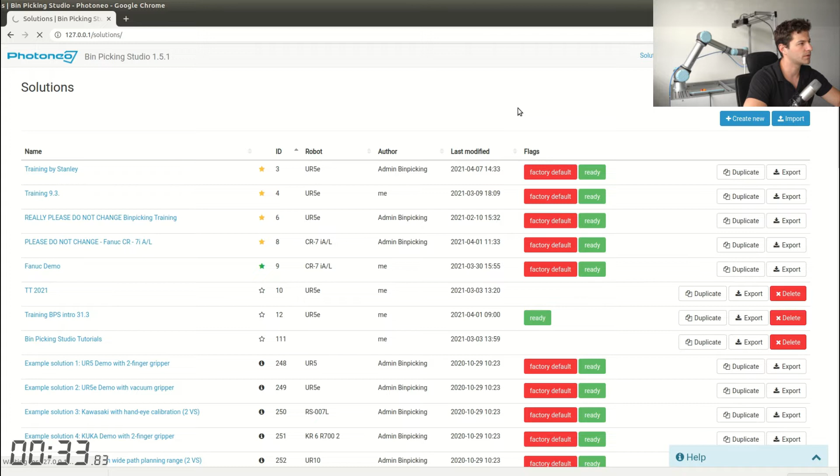In the background it is loading its files into the database. It will take something like 10 seconds usually. I will provide a descriptive name, so it will be bin picking speedrun, for example. I'll omit description for now. The robot is actually Universal Robot UR5 and it is E-series.

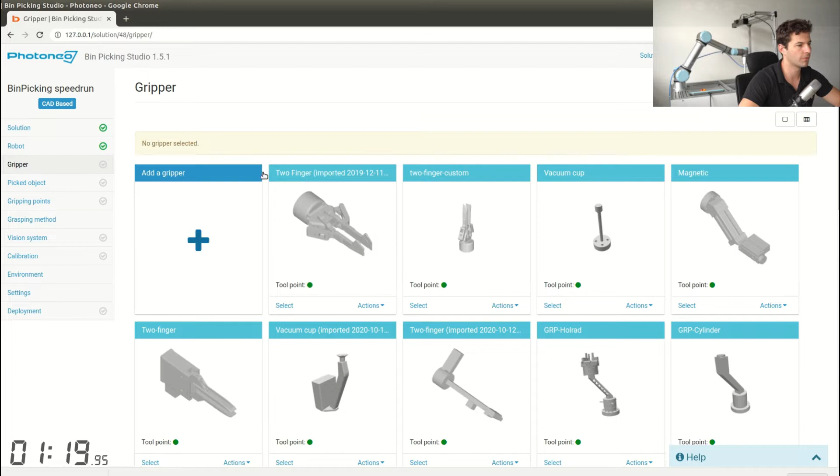Inside the robot there is already a bin picking program, a simple program which will be executing functions like scan, get trajectory, execute trajectory, move to the placing position, and similar. For the gripper, I'm going to create a new one from scratch. It will be gripper speedrun.

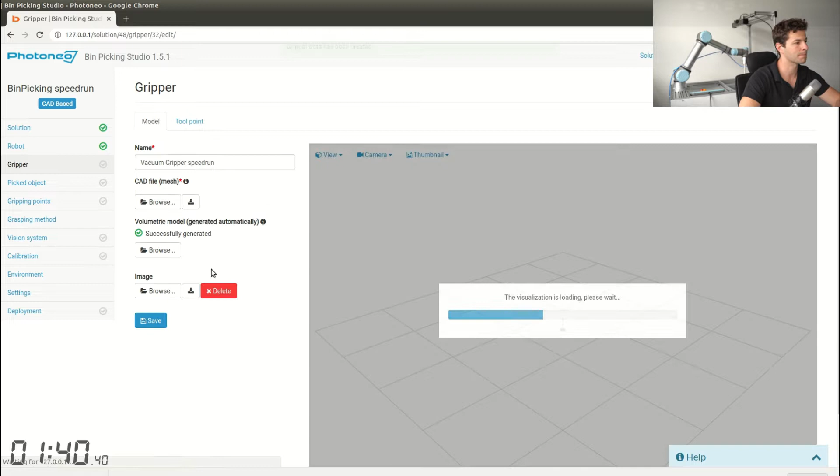Maybe provide a more descriptive name like vacuum gripper speedrun, and I'm going to open up the CAD file of my gripper mounted on the robot, and here it is. Double check if the origin of the file is on the bottom, and yeah, it's good. I'm going to use it.

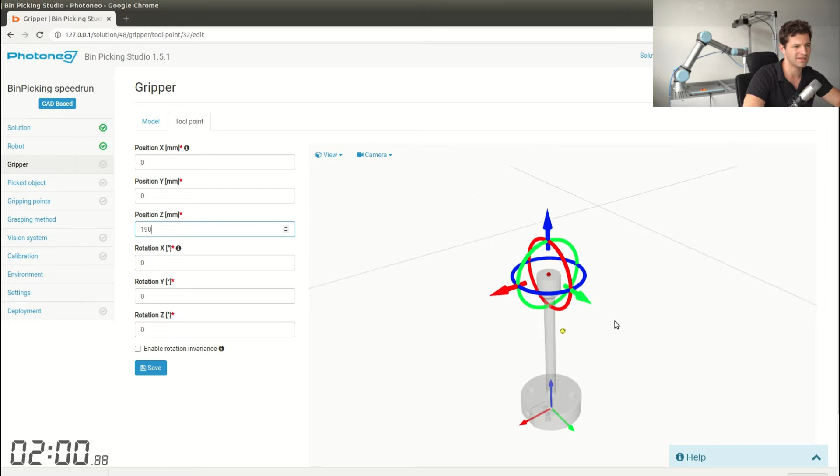To set up a tool point, I will use those arrows in here and move it to the favorable position at the end of the gripper, maybe round it up to 190 millimeters. Okay, it looks good to me as it is right now. You can see that the gripper is symmetric, so I'm going to enable rotation invariance in Z-axis and save it.

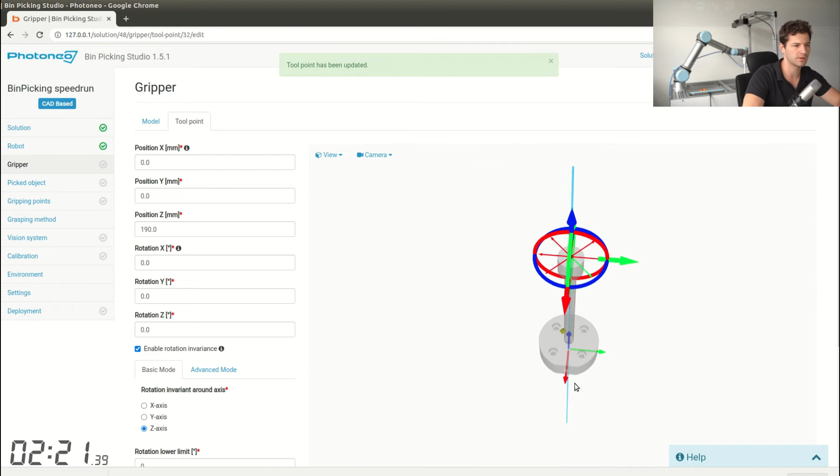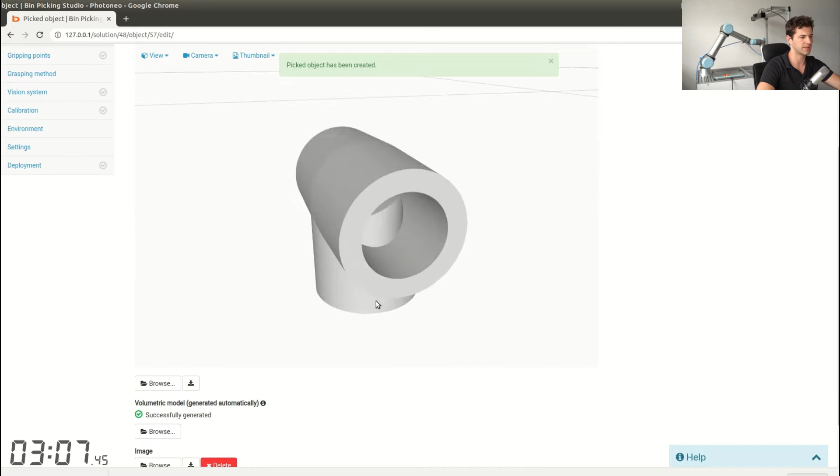For the part, I need to set up some gripping points on the surface of the part, and it's a simple process, just like for the gripper. It is plastic T-fitting. Alright, insert CAD file and save. Similar to a gripper, a volumetric model is generated for collision avoidance. I can examine, okay, my model is correct, and hit the save button.

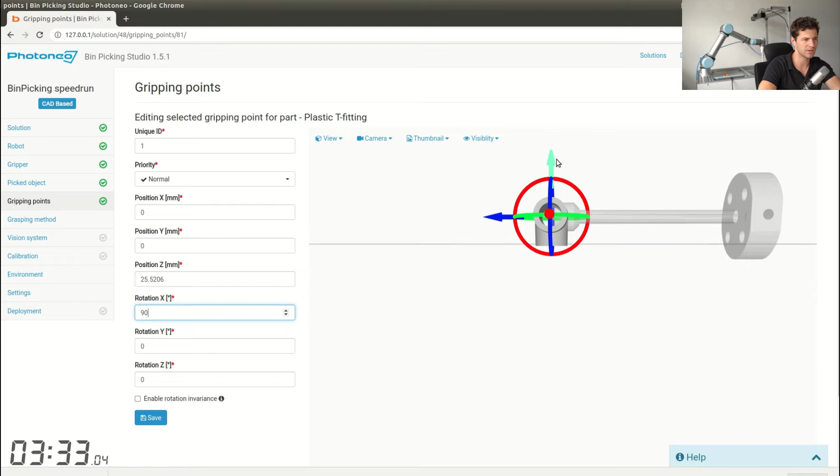For the gripping points, I'll choose my workpiece and I'll add a new set of gripping points via similar visualization. First of all, I'm going to rotate the gripper 90 degrees, so I'm going to pick it from the side, and maybe move it a little bit in this direction and this direction, so it is in correct position, something like this. This looks like a good position for gripping.

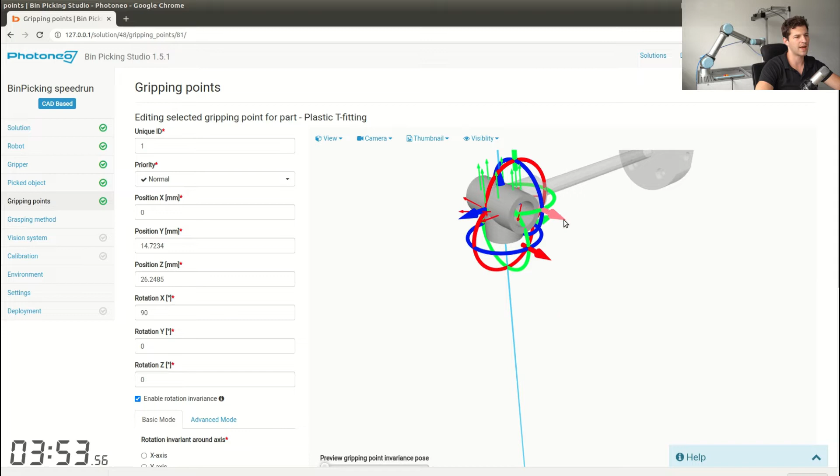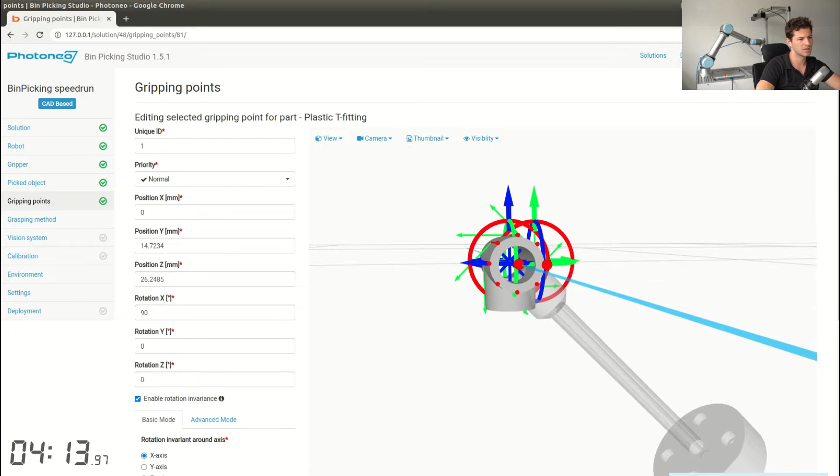Also, this piece has a little bit of symmetry itself, and I'm going to enable it, and I see it is an X symmetry, so this axis is loaded in here. I just need to move it using these arrows again to the correct position, to the center of the opening. And also, since I don't want to do a full rotation, just half of it, I will limit the upper limit to 180 degrees.

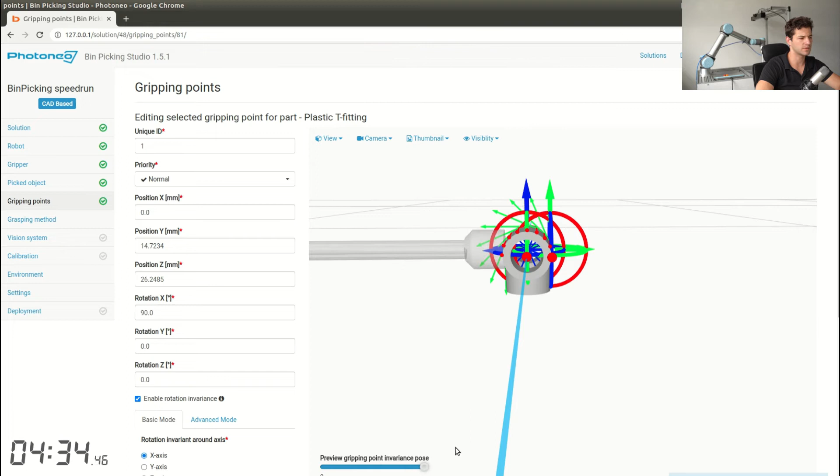Everything else looks good to me, and this is what I have right now. 8 different gripping points, actually 9 different gripping points all around the surface of the plastic workpiece. Hit save, just double check, okay, it looks good to me, going forward.

For the grasping method, we have multiple path stages. These are waypoints which are generated during the path planning, and these waypoints are like a blueprint for the trajectory. We will begin in start waypoint, going through all of these, and end in end position. Start and end positions are loaded from the teach pendant and they are saved positions.

So what I can do is just bind some kind of procedure to them. Detach procedure inside the robotic program is a procedure which has digital output set to 0. So I release the gripper before I'm going to do bin picking.

The approach waypoint is the first calculated waypoint, and it will take a grasping position, which is something like this, and will generate some kind of offset. I will use the coordinate space of my workpiece in order to generate this offset, and I'm going to set it to, let's say, 20 millimeters. It will be enough, 20 millimeters in front of the object, right? Something like this. If my object moves, this waypoint will be calculated in a different place.

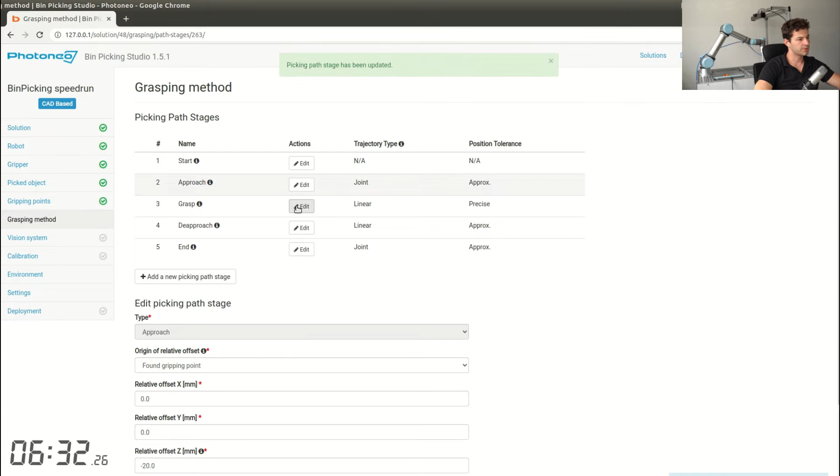And what I'm going to do as well is to enable attach right here, because I have a vacuum gripper, and the vacuum gripper may be enabled in front of the picking. So I'm going to go with enabled vacuum to touch the workpiece and literally suck it into the gripper. Save the position. Going to grasp. Since I enabled vacuum in the approach position, I don't need to do anything else.

Going to the deapproach position, and now the deapproach is the third one calculated. Actually, the grasp is calculated first, then the approach is offsetted, and the deapproach afterwards is a waypoint which serves as going out of the bin. Usually we use a robot coordinate system, or we use a fixed plane, which is basically the XY plane, offsetted from the base of the robot by some amount.

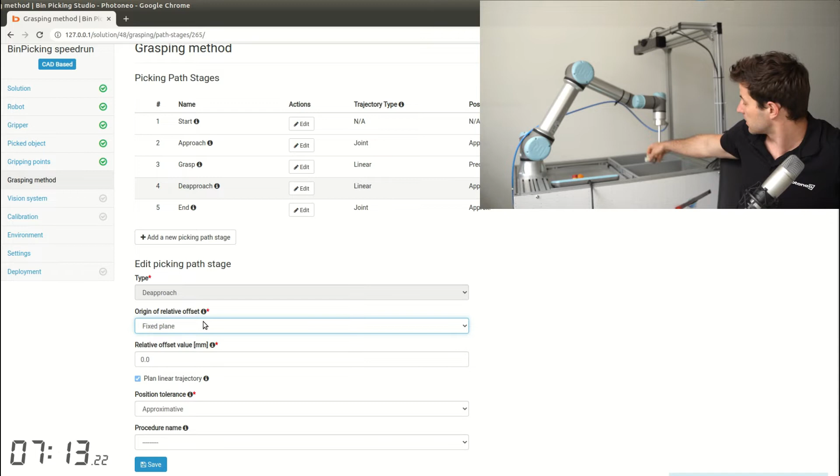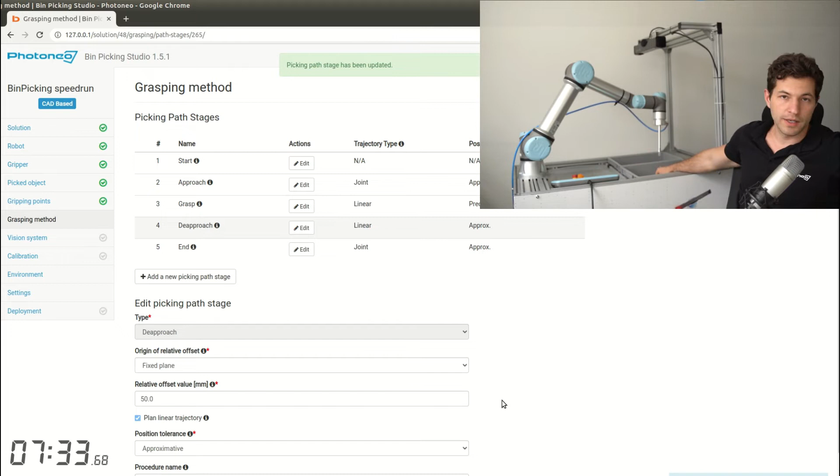Since I want to remove the parts like 5 centimeters above the bin, and the bin is ending literally at the base of the robot, I just need to put an offset value of, let's say, 50 millimeters in here. Very easy. And hit save. So all of the parts will end up 50 millimeters above the base of the robot, which is in fact above the bin. And hit save, and that's it.

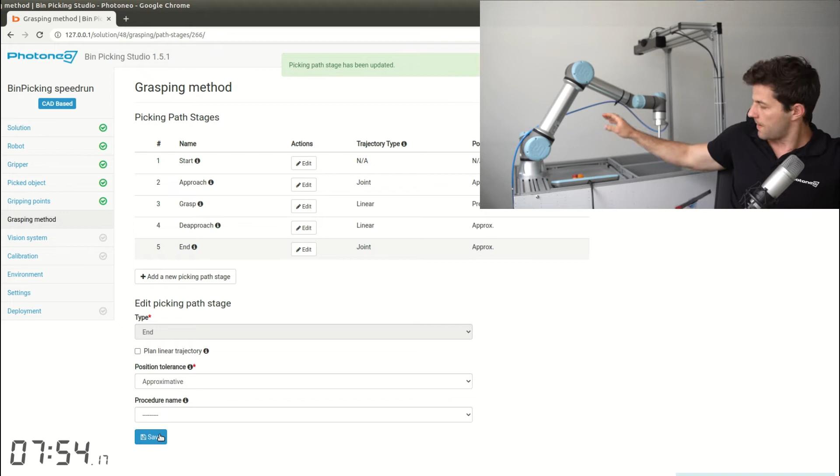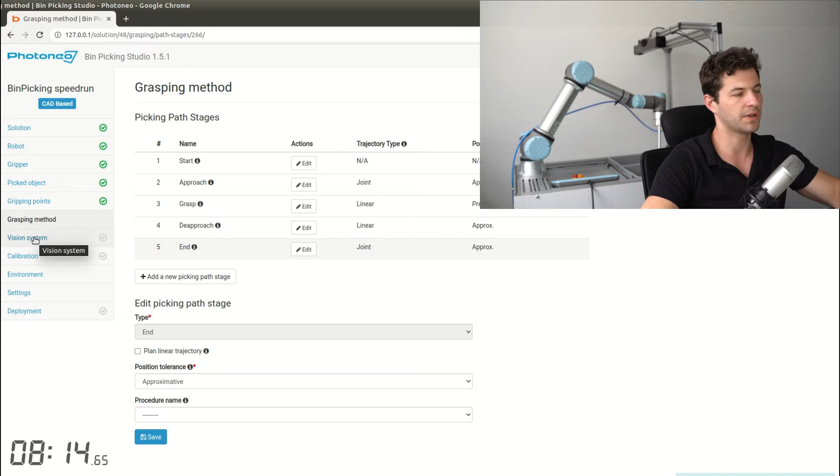After the deapproach, we are going to the end position. The end position is transmitted from the robot program into Bin Picking Studio, so I don't need to do anything else. Inside the robotic program, the bin picking ends up in the end position, and then there are a couple of MoveJ commands which will just navigate the robot to the placing position, and that's it. So these are the picking path stages as a blueprint for path planning. Combined with the environment, they will generate a collision-free trajectory.

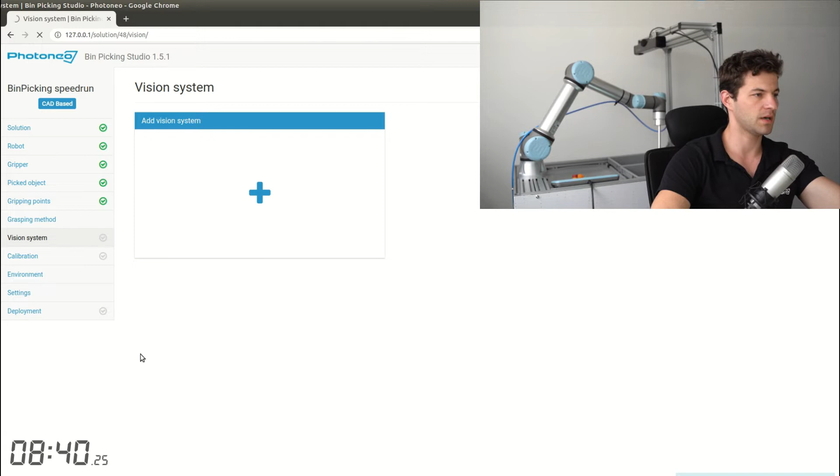The vision system part is used to bind together the workpiece, scanner position, and some other parameters. So I'm going to create a new vision system. We can have up to 4 different vision systems per one solution. This vision system is loaded in the background. It will generate this form. I will put the name for this vision system for T fitting.

Scanner ID will be used. The scanner I have attached on the top of the robotic cell, which is 1709004, right? It is a scanner M sized model, and it is mounted on the robotic cell. The picked object will be the plastic T fitting, since I have only one, and I need to create a localization profile. This is CAD based localization.

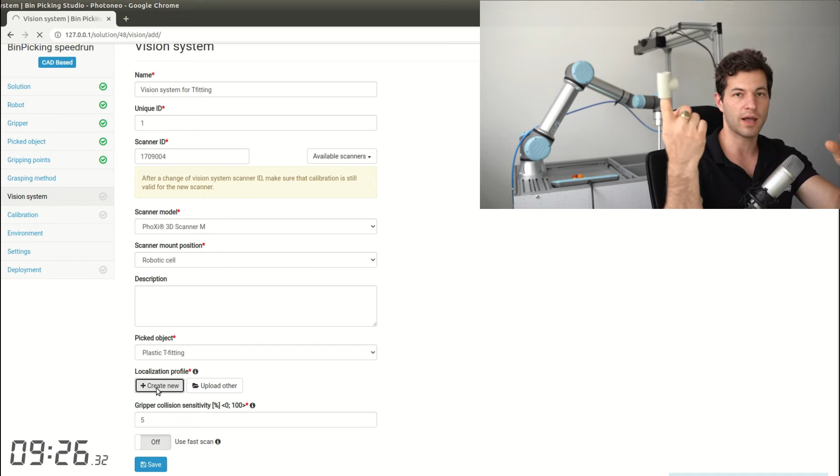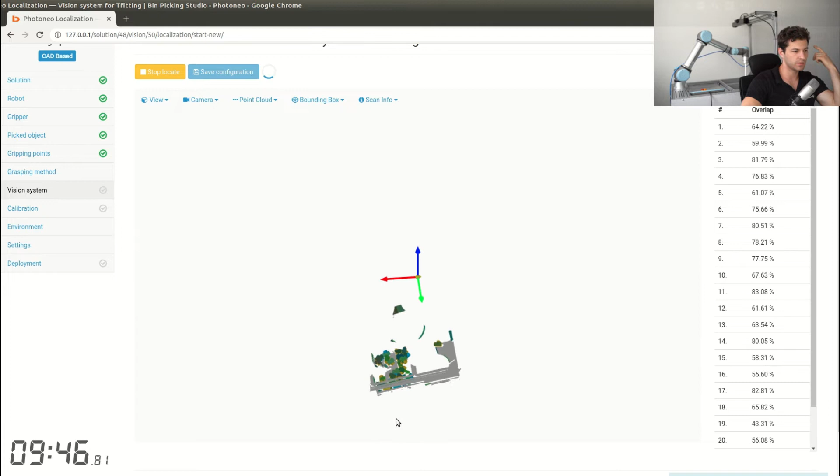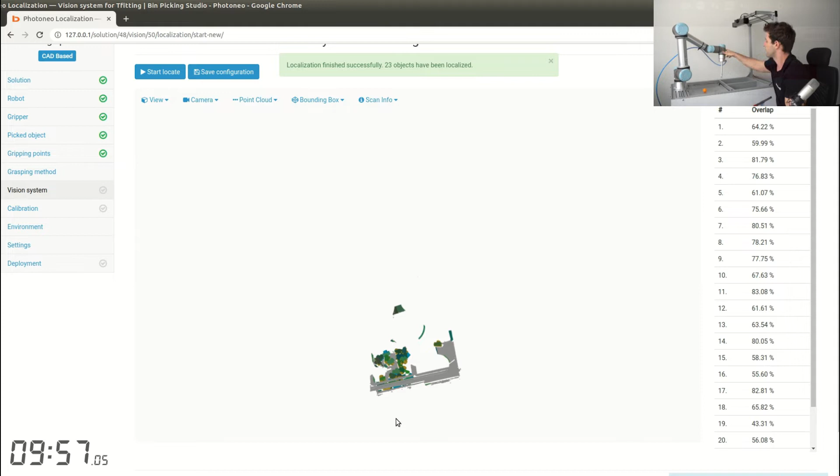So what is done in the background: the CAD file I uploaded into Bin Picking is loaded into the localization SDK, and when I hit start locate, the localization is actually starting right now. And in a couple of seconds, the point cloud from the scanner was transmitted into the studio. And now I see the robot is blocking the view, so I'm going to move him just a little bit, so we can see a little bit more into the bin.

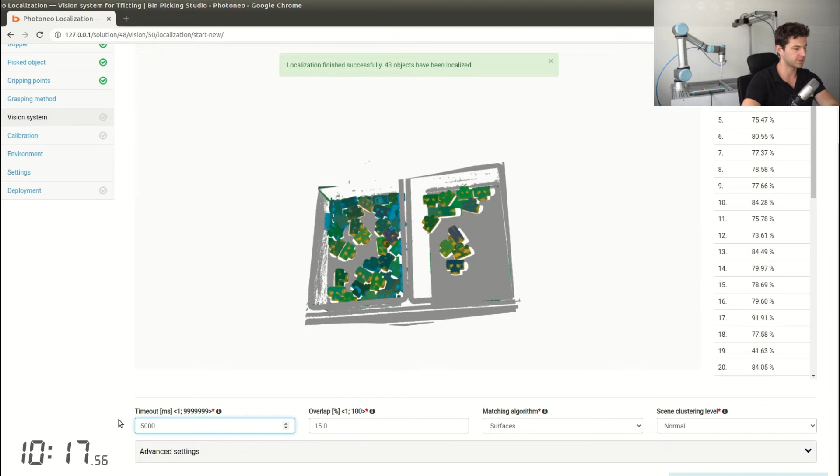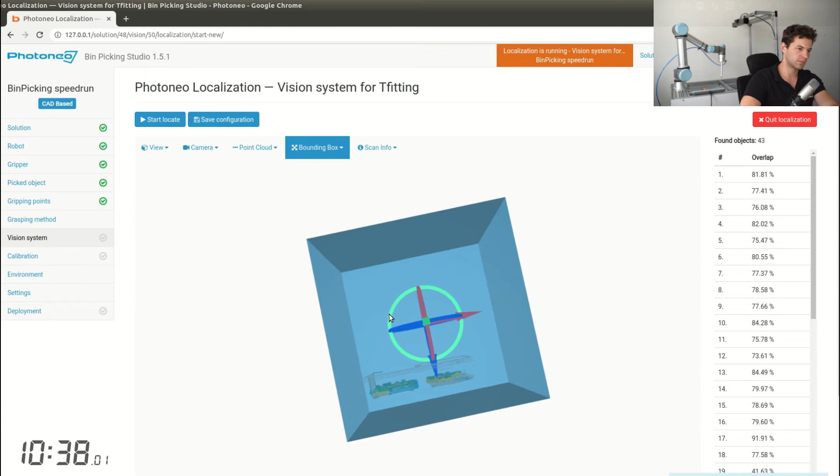Alright, now we have 43 parts in the first couple of seconds, and since nothing else was happening, I'm going to limit the timeout to 5 seconds only, so it will not be consuming all this processing power for that long duration. And also I'm going to enable the bounding box, because I'm going to pick only from the one bin, not both. And I will rotate it just a little bit, also move it to the correct position, something like this. Maybe I can also resize it to avoid any false positives.

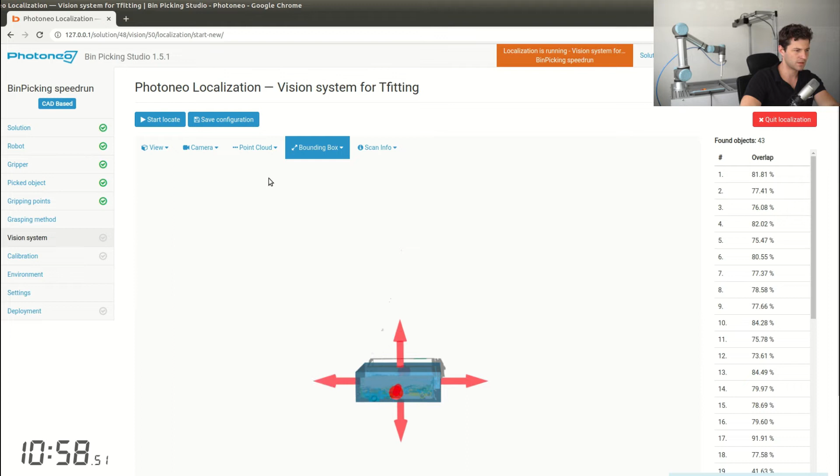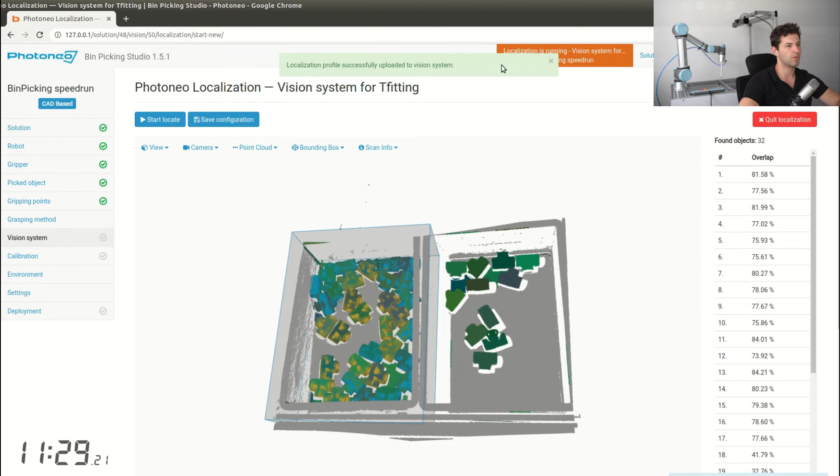Right now, when I hit start locate, you will immediately see it in action, since I have parts only in the left box. Oh yeah, it's actually the right box, right hand side of the robot. Good, pretty satisfied with the result. Out of the box settings are good. There are more settings than just these 4, but they are running pretty smoothly out of the box, so I'm not going to change them right now. I'm going to save the configuration, and once the configuration is saved, I will quit localization.

Okay, and afterwards we have localization profile. We can set up collision sensitivity. This is a threshold, how much of the point cloud is noise and how much is actually colliding with the gripper. This is something you will fine tune after you run bin picking for a couple of cycles. And I will be using fast scan, which is using only a 2-dimensional image, which is acquired in a fraction of a second, to compare previous scans, and this can literally save you seconds from cycle time.

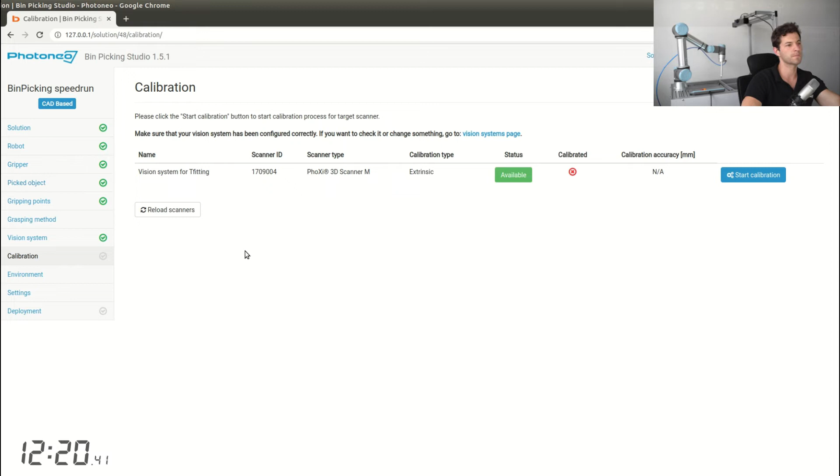Calibration matrix is pretty empty right now because we didn't do any calibration so far, but we are going to do one now. To start the calibration, I need to just select the proper size of my ball, which is going to be used for calibration. And from the robotic side, I need to remove the bins and attach a ball to a gripper. Yeah, my ball is attached.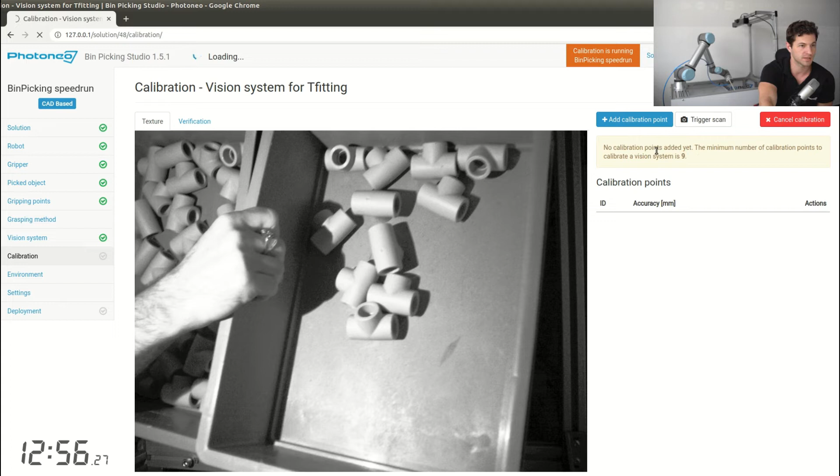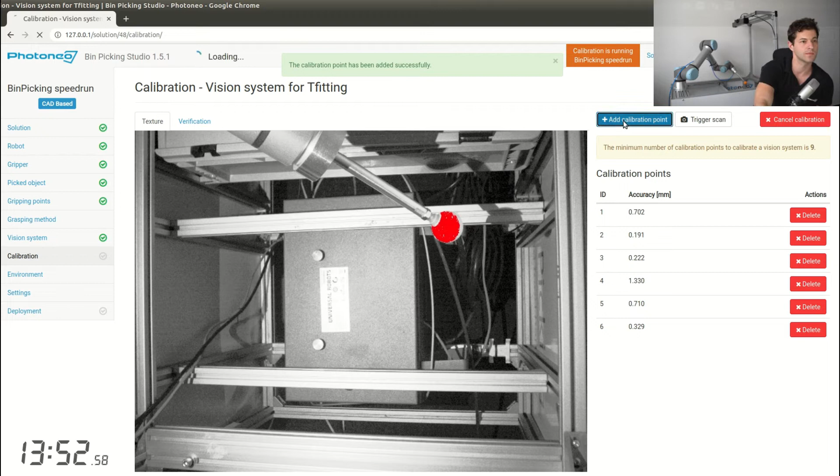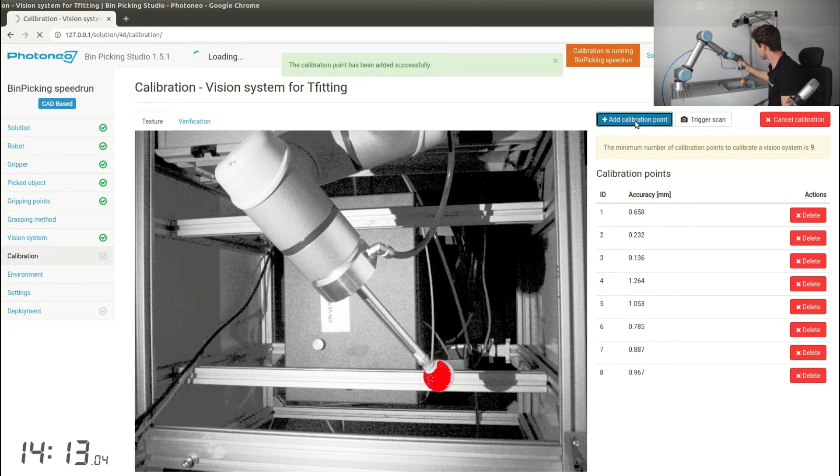And for calibration, I need to move the robot to 9 different locations and acquire a full point cloud from those locations. Each step is recorded in the calibration process, so I'm going to repeat this 8 more times. Yeah, and I actually did one extra, unnecessary, but whatever. And we see a result now.

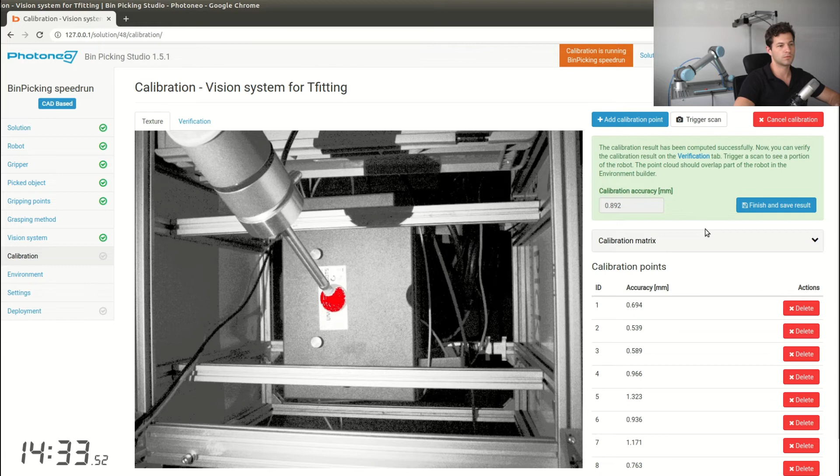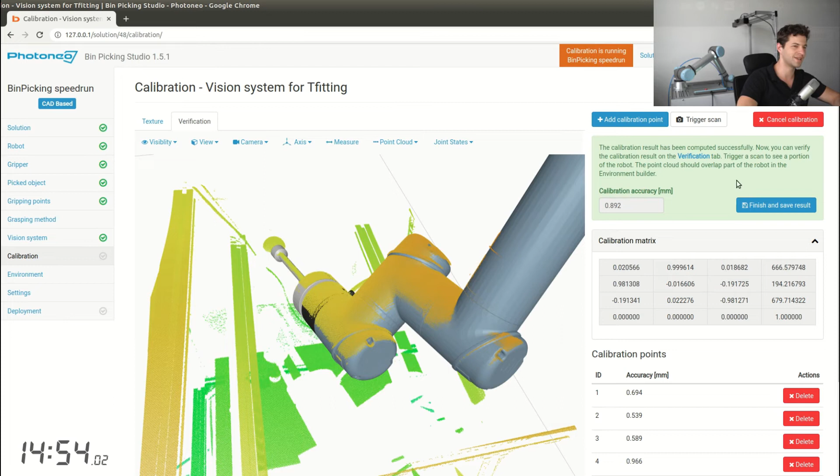A calibration matrix is filled in with some data, and we can also see a verification of our calibration, which is neat to see whether the calibration is really as accurate as it says. Right now it says it's 0.9 millimeters, and it definitely looks like it is that accurate. Yeah, there are a couple of points floating around for a millimeter, but nothing spectacular. Otherwise it is matching pretty consistently the position of the robot.

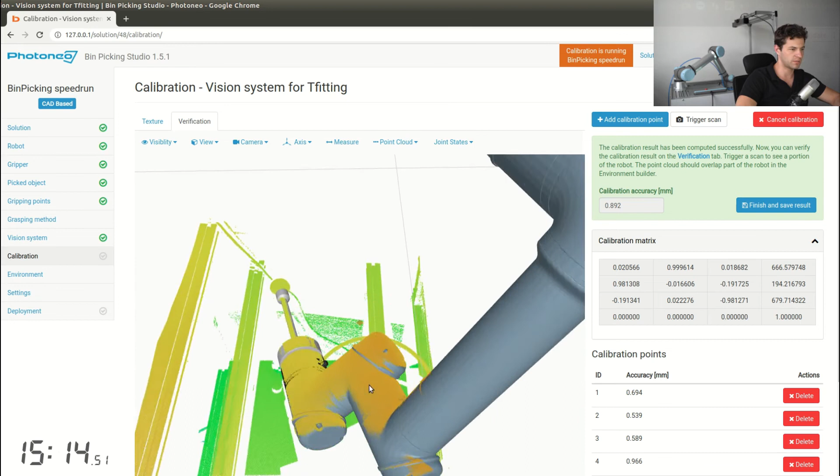Okay, this was calibration in just a couple of minutes. I am satisfied, so I'm going to finish and save the results of the calibration. Put pins back into the bin, into the robotic cell, and move the robot a little bit away.

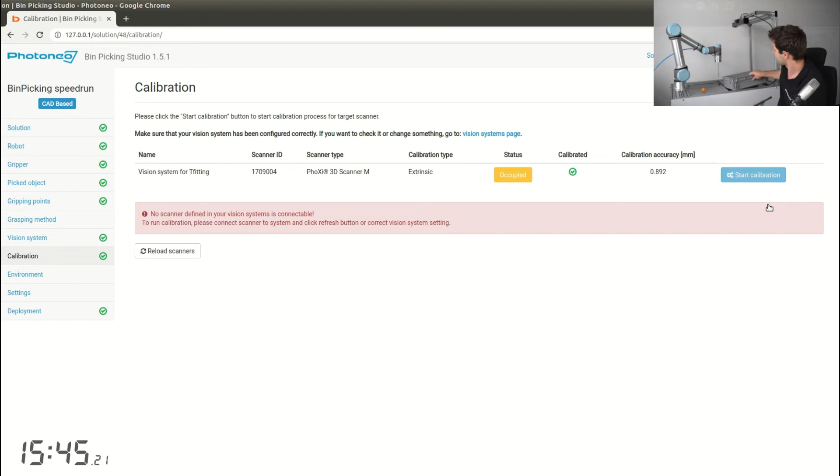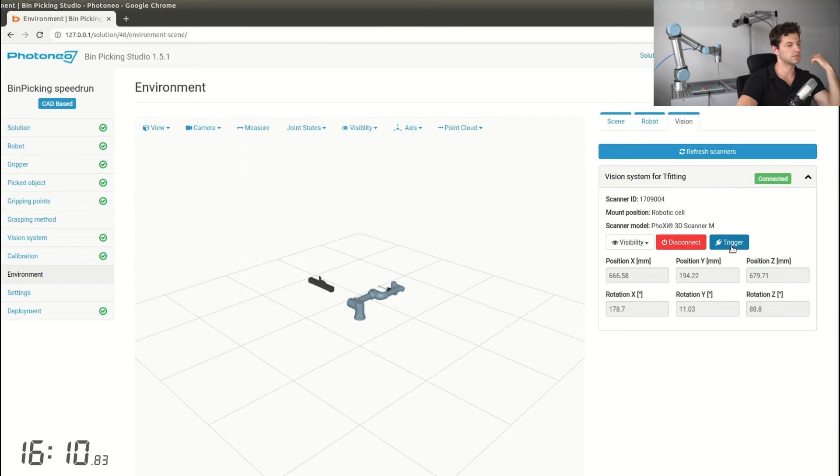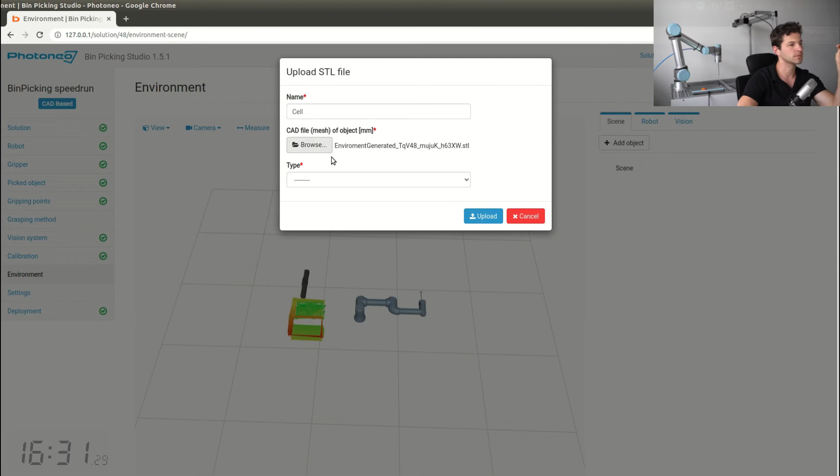Okay. For the environment, for successful path planning without collisions, we just need to upload a couple of CAD files, like the robotic cell and maybe a wall. So I'm going to help myself with the scanner. Okay, I see the point cloud in here, and now I can use it as a reference for moving all those CAD files in here. So it will be cell, robotic cell, and it is type environment, and I see it is rotated 90 degrees, so I'm going to rotate it.

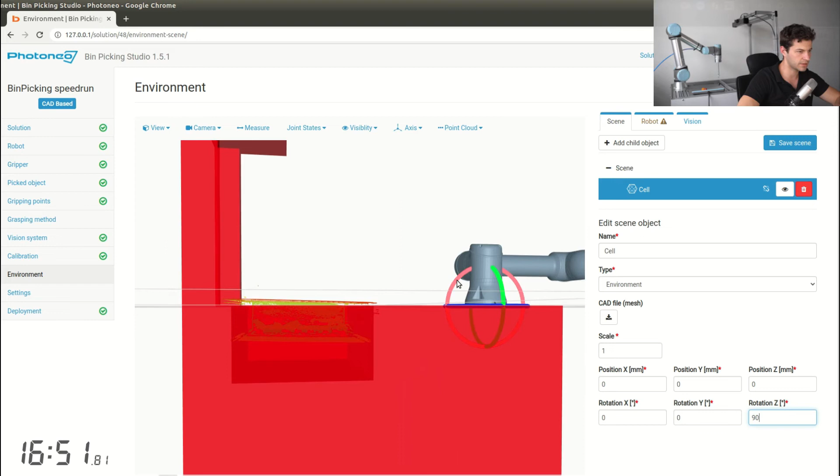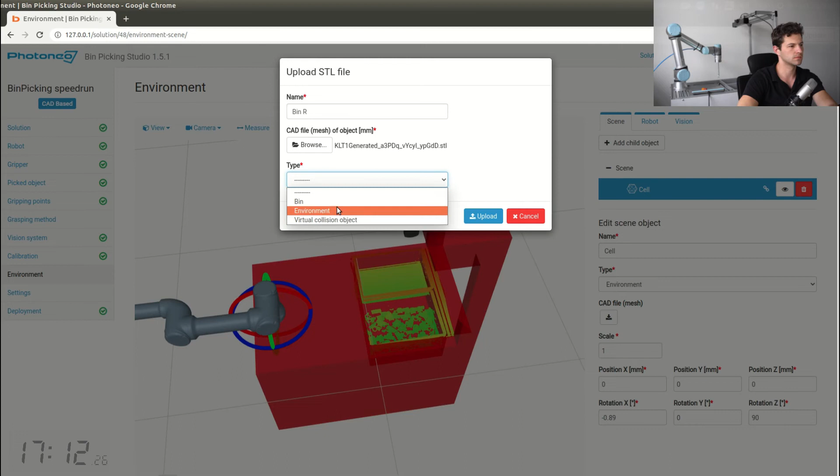You can always use these sliders. Okay, also I see it is rotated a little bit in this direction, just 1 degree or such. Okay, this is the correct position of my robotic cell. I'm going to add a bin, right? Yeah, and it's already in the correct position, good.

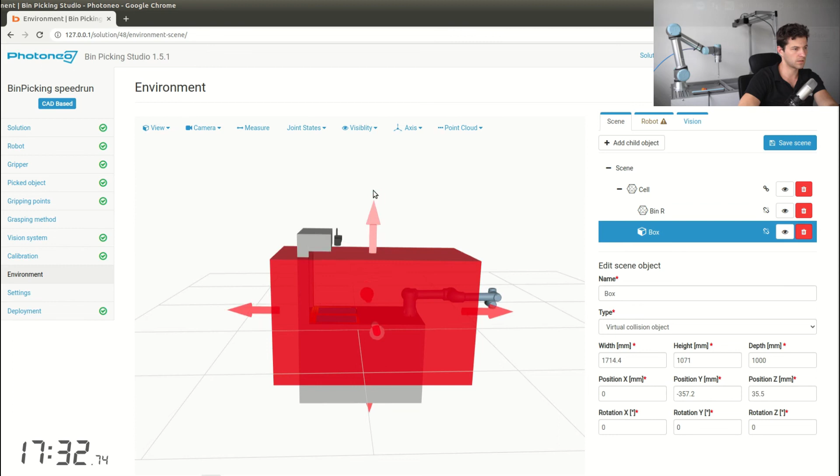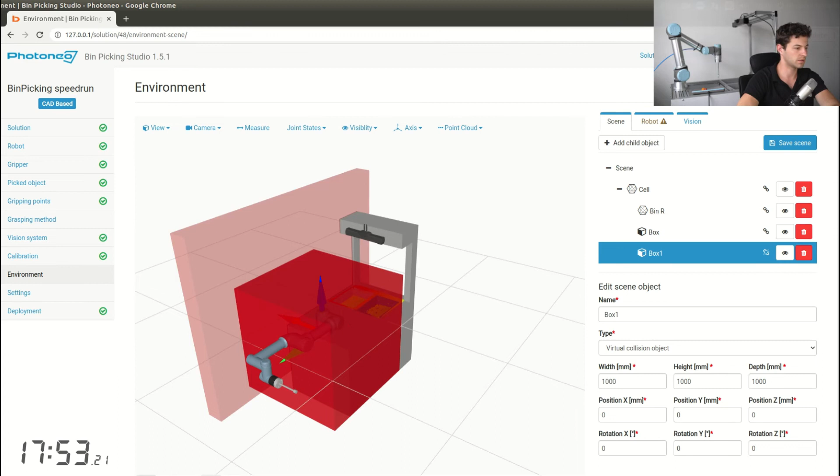And also I'm going to add a wall behind, and I'm going to create one from the box, which is pretty simple. Just move it and extend it a little bit. Good. So this is my environment. Also I can create a new wall to actually guard me in here, so the robot will not touch me either. Right now the robot has limited space to move in, and this is basically it.

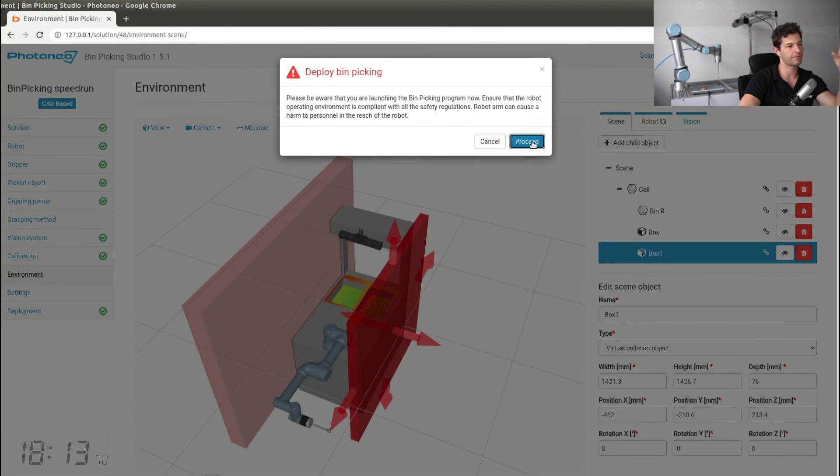I have finished the environment, every single step is finished, so I can proceed to the deployment of the bin picking. When I try the bin picking the first time, I usually lower the speed to some reasonable value, like 30 or 25%, just to see if everything was set up correctly. Then slowly increase the speed of the robot. So right now I'm going to start the program and see how it behaves.

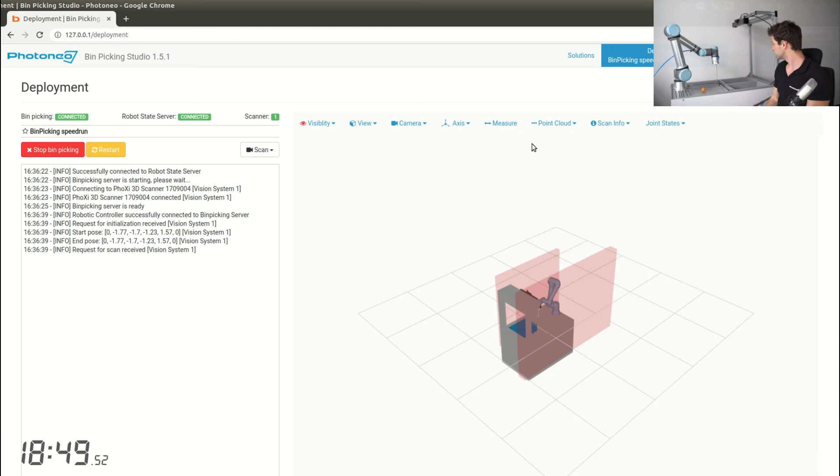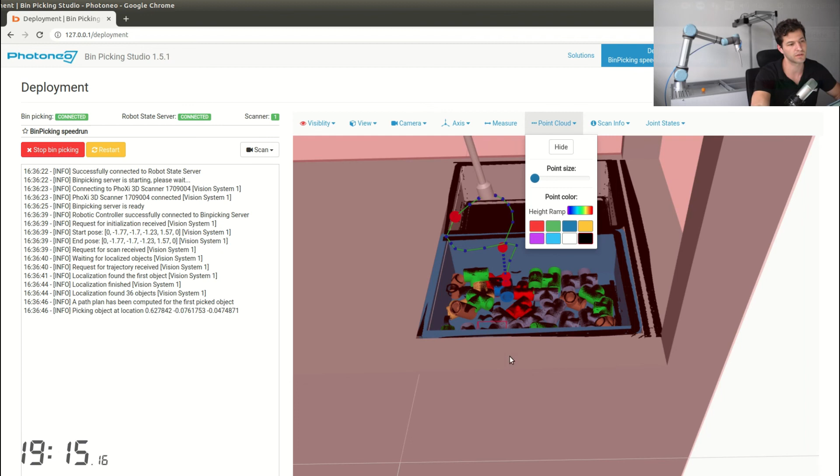The scan was acquired and we see parts in the bin already, and also a trajectory which was calculated for the first part. Okay, you heard the vacuum, and it barely touched the part, so I know that I need to adjust the TCP point just a little bit, only a couple of millimeters closer to the part, so I won't miss it.

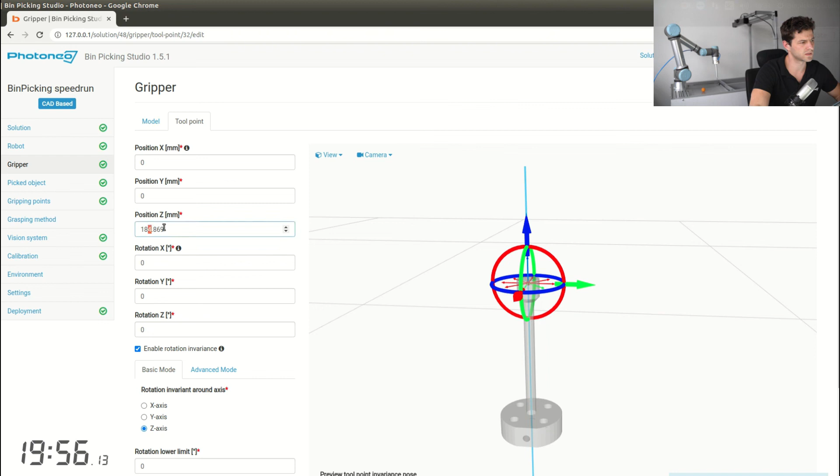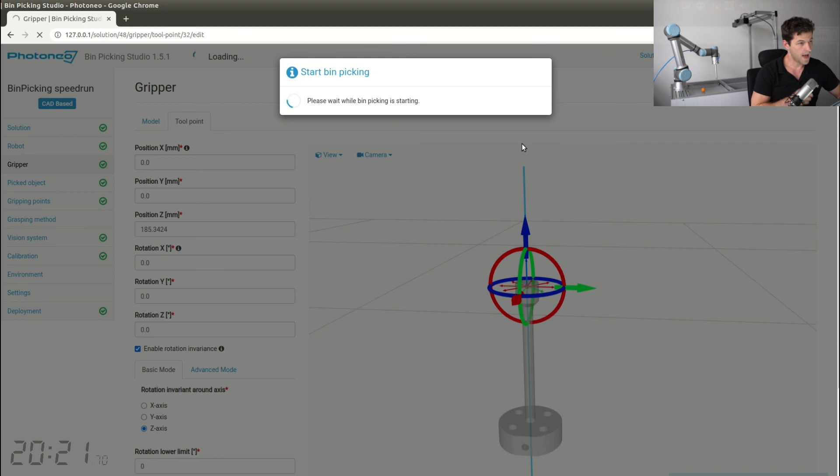Open up the project, gripper, edit the gripper, TCP point, and move it a little bit closer. Like this. Save. It is always better to extend the TCP point and not pick the first time, instead of, you know, going too close and damaging the gripper or the part. So I corrected that. And I am able to start deployment again.

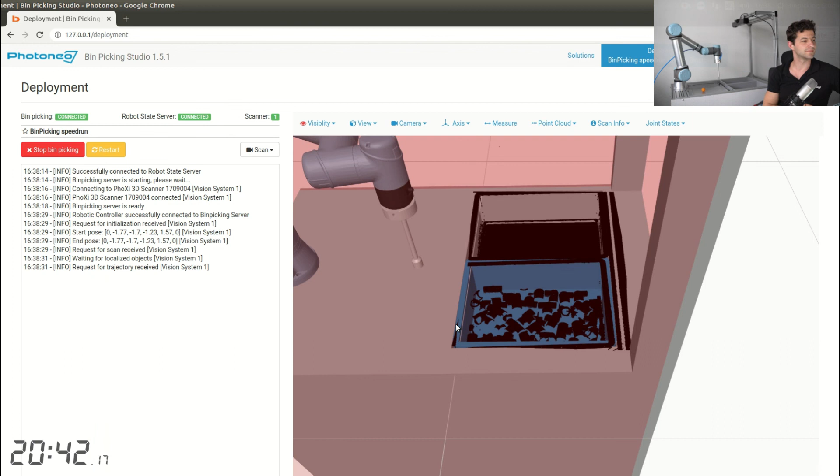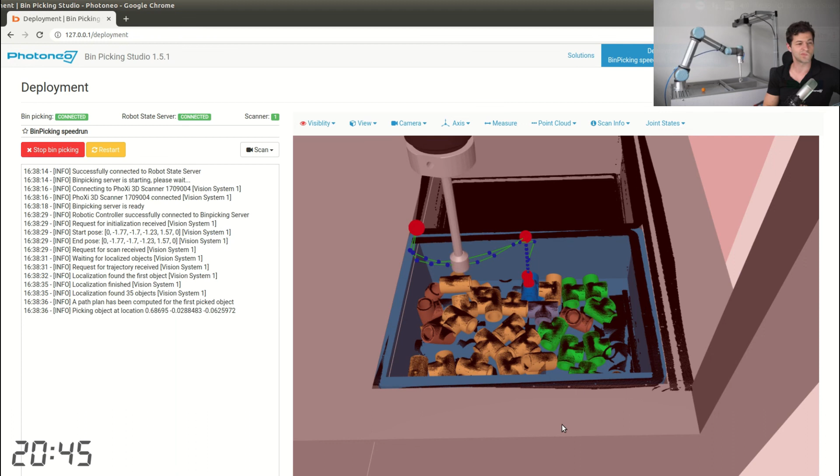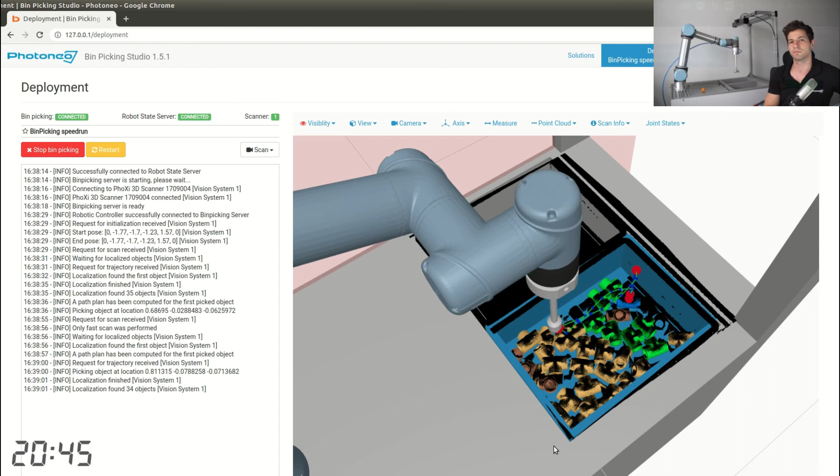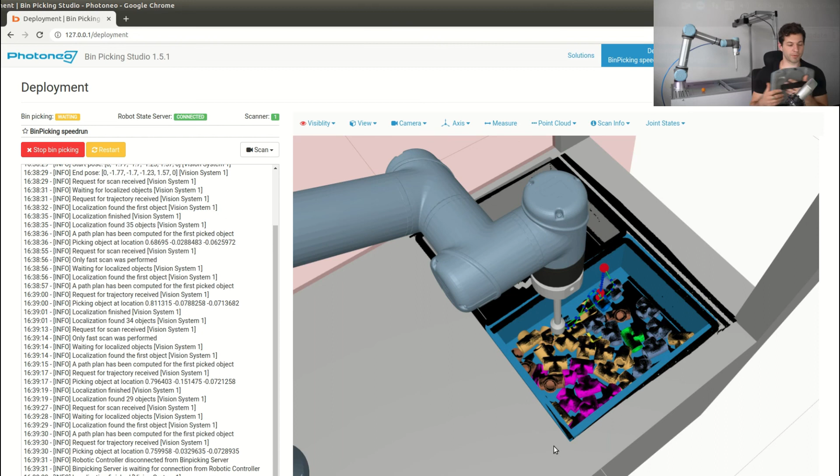Cool, the bin picking is running, the robot is connected, and start the program. Okay, I'm going to stop it in here. You can see it was super fast and super easy. Well, everything was running as expected. We created solutions from scratch.